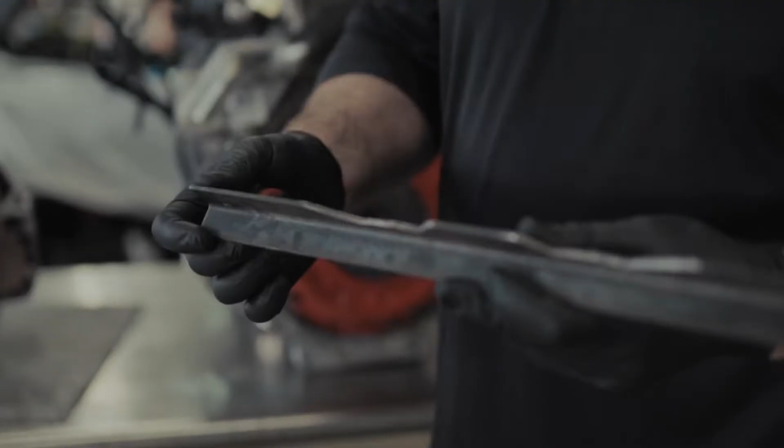The first thing you're going to need is some form of straight edge. You can find a piece of angle iron at a local hardware store really cheap. It doesn't even have to be angle iron, it just has to be something rigid that you know is pretty darn straight. I've modified this one to clear the edge of the pressure plate. I went excessive here just so you could see what I was doing. The reality is you really only need maybe an 1/8 inch of clearance here.

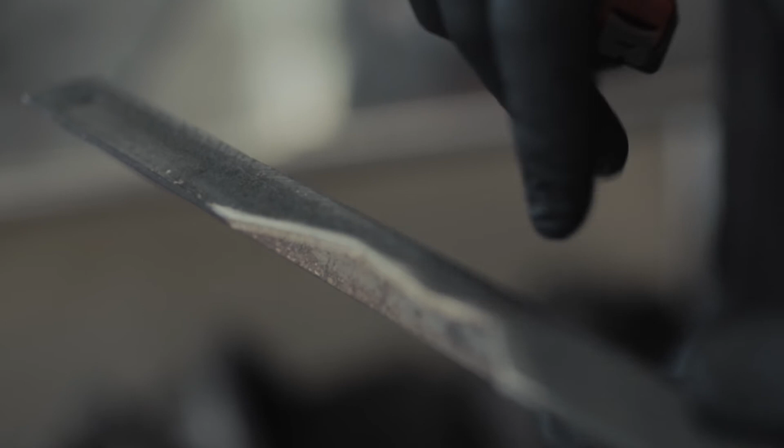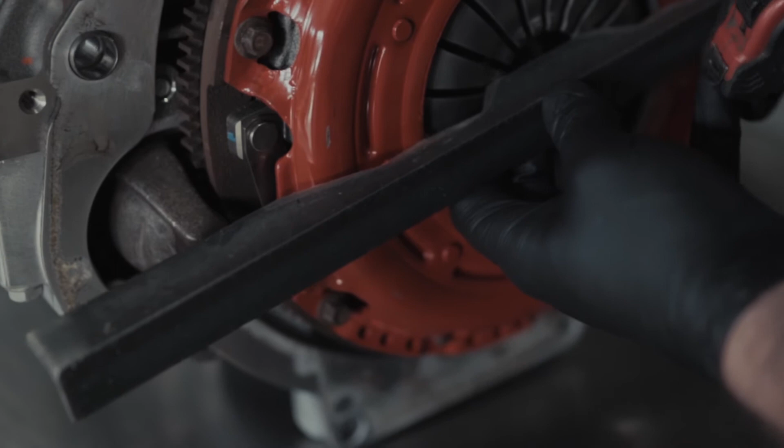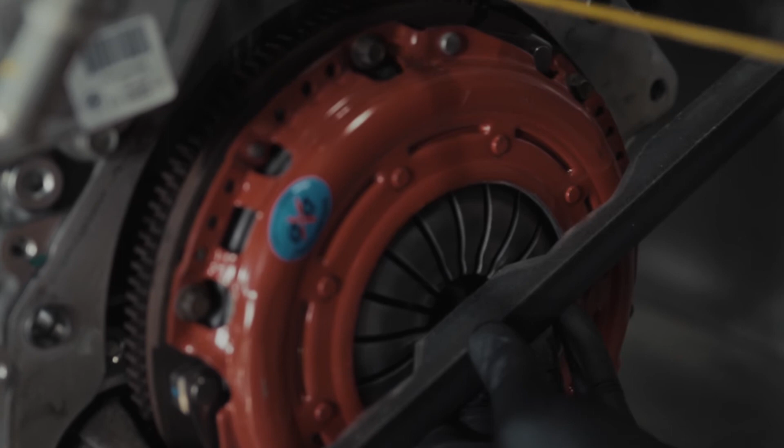So what you're going to do is take this straight edge and rest it on the clutch fingers without pushing down on them. Then you can take a tape measure and measure the distance from the edge down to the block, and you want to make sure you do have this bell housing spacer on the block.

So what we have here, and you can check both sides, is right at 2 1/4 inches. I'll mark that down as our measurement B.

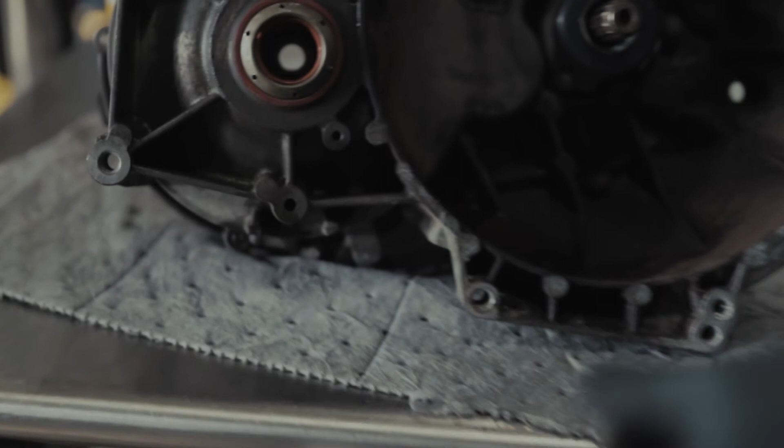Then you'll go over to your transmission with the throwout bearing installed, and it's going to be a lot easier if you have a friend to help you. So I'll hold this straight edge up against the mating surface, and then have someone push the throwout bearing until it's all the way bottomed out, and then you're going to measure this gap here, which is 2 5/8 inches.

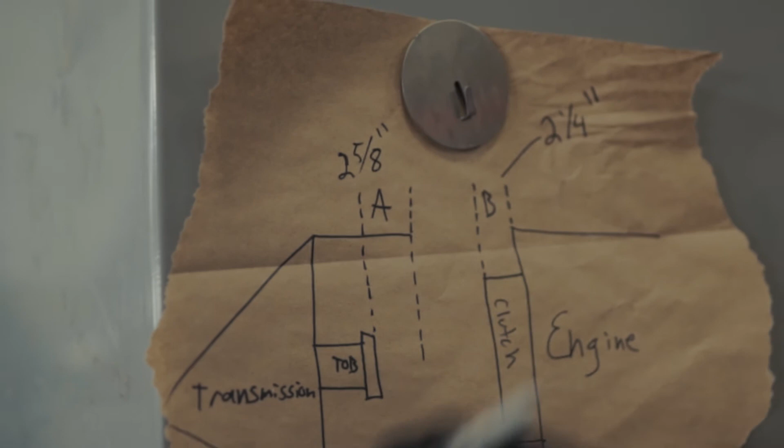So we'll mark that down, 2 5/8 inches. Now you subtract your B measurement from your A, so that is 3/8 of an inch.

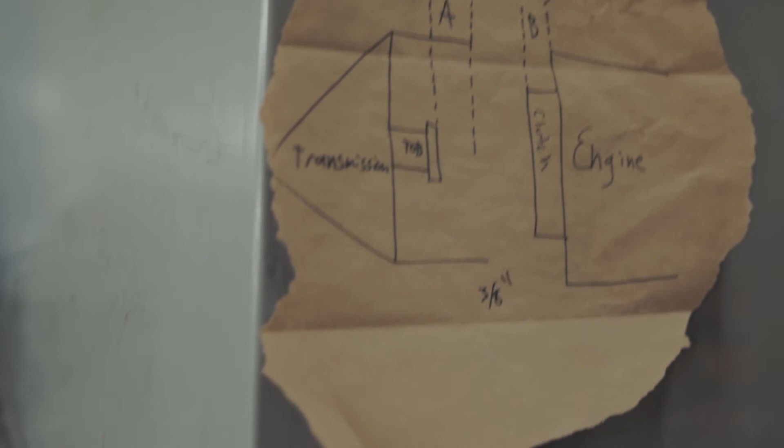The ideal air gap you are aiming for is somewhere around 150 to 200 thousandths, which in fractions is going to be around or a little over 3/16 of an inch. If we put the 1/4 inch spacer in here, then we would only have 1/8 inch left, which is 125 thousandths, and as the disc wore out, eventually you would get to the point where the throwout bearing would bottom out. So this is a situation where with a 3/8 gap, you do not want to use the spacer.

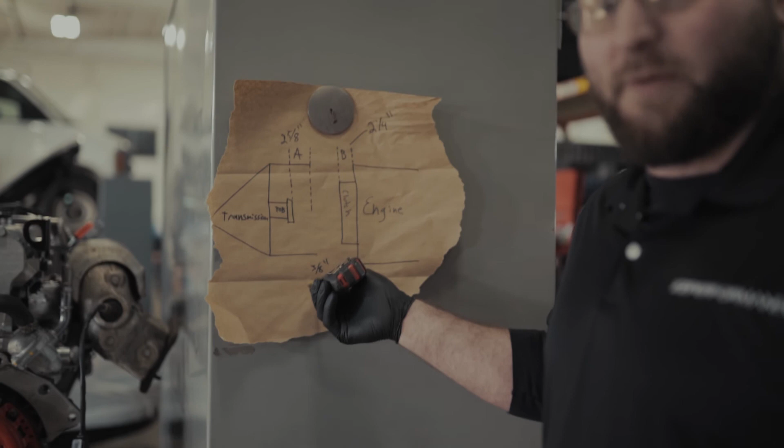If, say, this was a 1/2 of an inch, then you absolutely would want to use the spacer, because that is going to take your air gap down to about a 1/4 inch, which is within the limits of not overextending the throwout bearing.